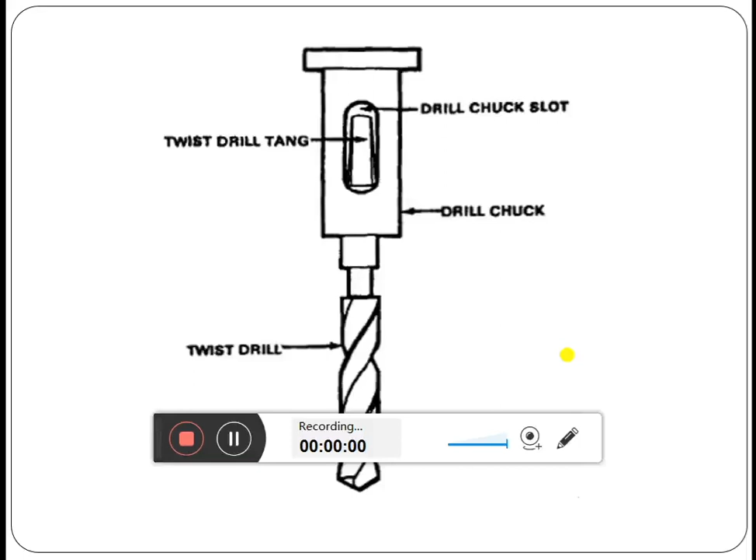Hello students, we will discuss in this particular video about the various operations which can be carried out on a drilling machine.

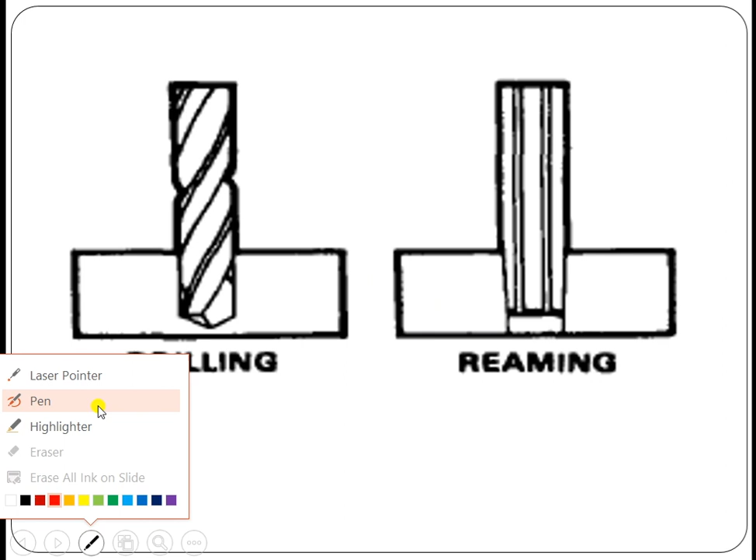Now these next 3 to 4 slides will explain you which are the various operations.

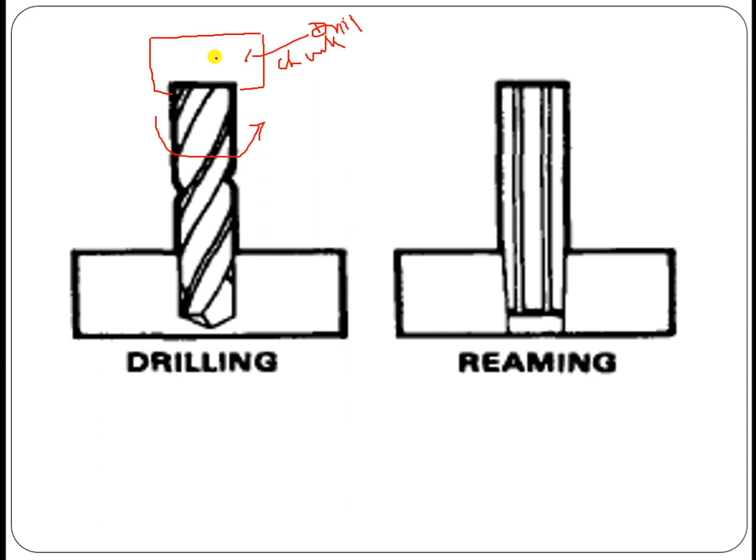The first operation is drilling, the basic operation, in which this is the drill bit. This part is available inside the drill chuck. This is the drill chuck, inside which this particular drill bit will be inserted and keyed in a proper manner so that it will not be removed from it.

This will be connected to the spindle. This whole part will be connected to the spindle coming through the gearbox assembly and the electric motor, that is the power mechanism, which will give the rotary motion to that spindle and in turn to this drill chuck and in turn to this drill.

Now whenever you want certain kinds of holes, that may be 4 millimeter, 5 millimeter, 3 millimeter, depending on that the drill sizes will be varying, and you will be getting that kind of hole up to a certain depth, or it may be from this particular surface to this particular surface.

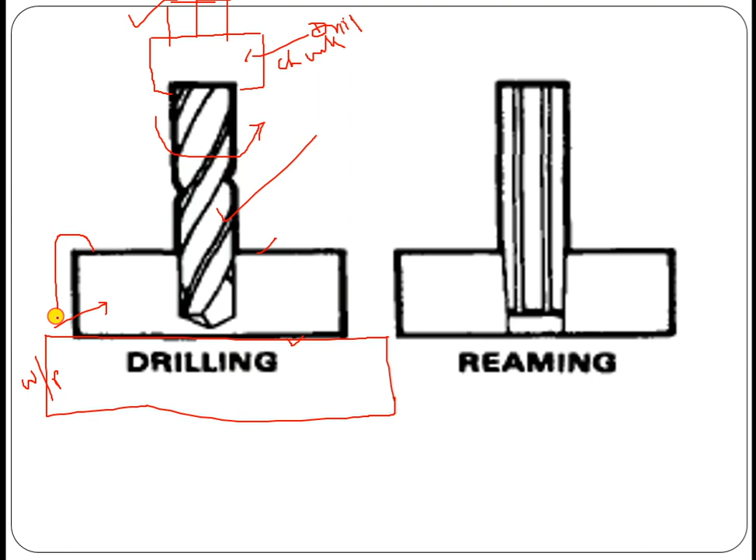This is the workpiece. Now this workpiece, as already told, will be held or placed in a work holding device, properly supported with the help of a vise, inside which it can be kept in a proper manner so that it will not get removed and the drilling operation can go on. That part is very important and is available on the drilling machine.

So whenever it rotates in clockwise or anti-clockwise direction, the material removal will take place, because this is made with sharp edges which are moving along a cylindrical bar, having a few slant edges going in a spiral manner, which will remove the material. And this is a sharp tip available which gets inserted into the workpiece, initiating the material removal process from this particular workpiece.

No doubt it is harder as compared to the workpiece in all cases. In case of a milling machine also, the milling cutter is harder compared to the workpiece from which material is removed. In case of various lathe machine operations, the single point cutting tool, knurling tool, chamfering tool, slotting tool, boring tool, or thread cutting tool, these are all harder as compared to the workpiece material from which it is removed.

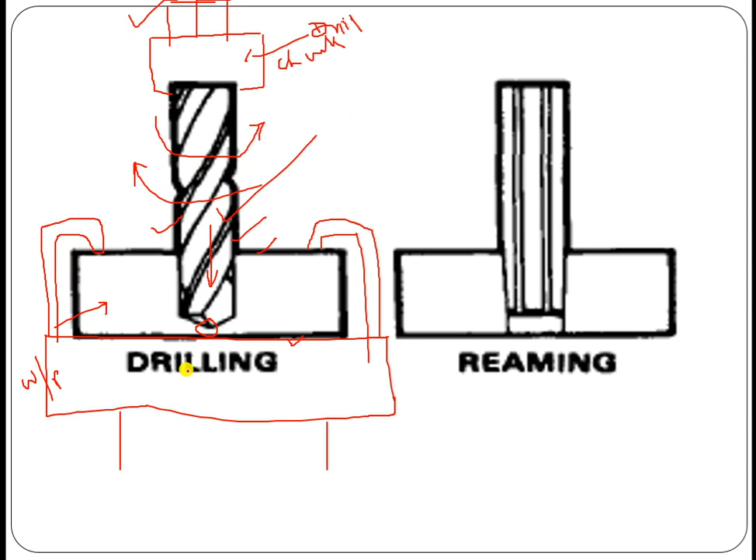This is a simple drilling process by which you can have circular removal of material, maybe from 4 to 5 millimeters to a maximum of maybe 15, 20, 25 millimeters, depending upon the drill size.

Now reaming is the second operation which can be carried out after the drilling operation. Whenever you drill any kind of hole, it may have a certain kind of burr in it, and its internal side is not very properly machined.

So for that purpose, such a kind of tool, this is the tool having vertical serrations and very small sharp edges on it. Again this will be rotated clockwise or anti-clockwise depending on the requirement, and it will be inserted in the already drilled hole, so that whatever burr-like structures are available on the already drilled hole are removed, and it will slightly increase the size of the already drilled hole by maybe half a millimeter or less, but it will certainly give a proper surface finish to the already drilled hole.

That is the reaming operation, which is generally carried out because it facilitates the smoothing of the internal surface of the hole, so that other components can be located, inserted, or assembled in it properly.

Another operation is boring. We have already seen in case of a lathe machine that the boring tool can be mounted on the tail stock. I will not show again how the workpiece is held, whether with T-bolts, how the drill chuck is attached, how it gets motion from the spindle, and how the spindle gets rotation from the gearbox assembly and electric motor. The same applies to reaming and every machining operation carried out on a drilling machine.

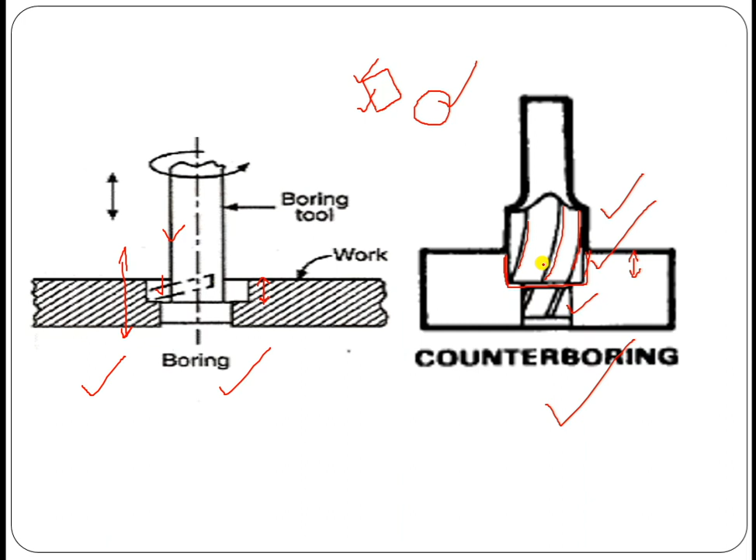Now counter sinking is also there. What is the difference between counter boring and counter sinking? Here the same kind of structure is there, but the tool has a conical shape, so that a conical recess can be created, inside which conical head bolts can be inserted, so the heads are properly located and don't protrude on the upper surface, which could otherwise hinder assembly or other operations on that machine component.

The next operation is tapping. It is nothing but the already drilled hole being rotated again with a tap-like structure having external threads, so that internal threads are created inside the already drilled hole with the help of tapping operation.

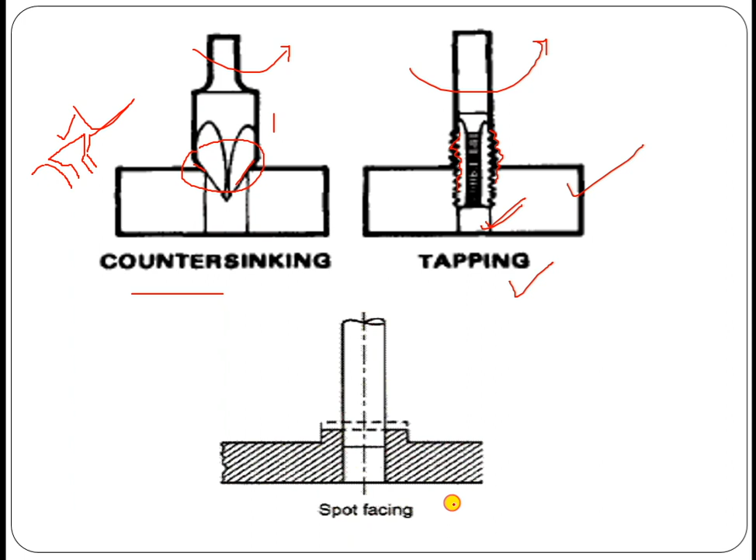In case of spot facing, again we have enlarged holes in the already drilled hole, but with a very small depth. This is possible with spot facing operation. This will again be rotated. It is just like counter boring, but instead of a particular depth, it is a very shallow depth.

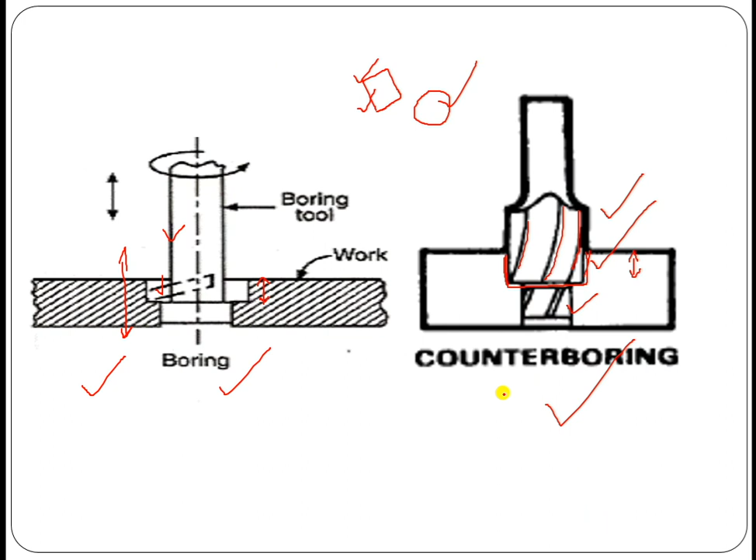So try to remember these operations: drilling, reaming, boring, counter boring, counter sinking, tapping, and spot facing. And this is drilling, which we have already seen. These are the operations, try to remember them. I'm ending this presentation on various kinds of drilling operations.

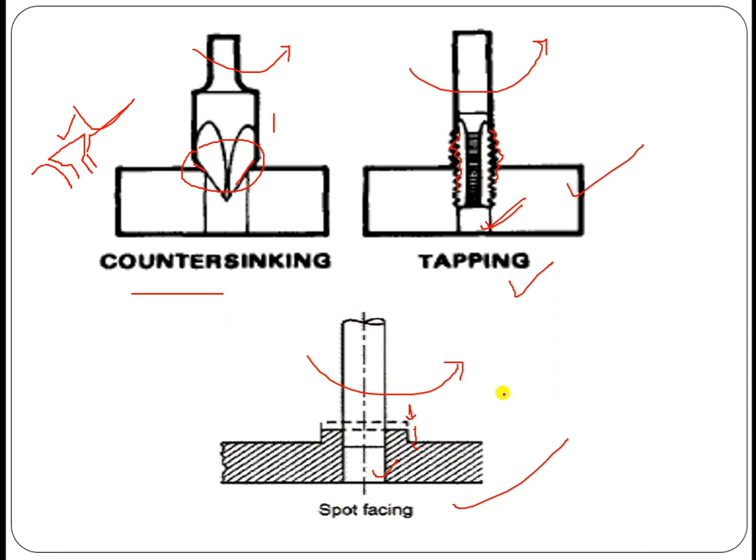Try to remember these two-dimensional figures also. Out of the operations we have seen, that is 7 operations, try to remember at least 3 to 4, so that you can explain them in examination with the help of these two-dimensional diagrams in a proper manner.